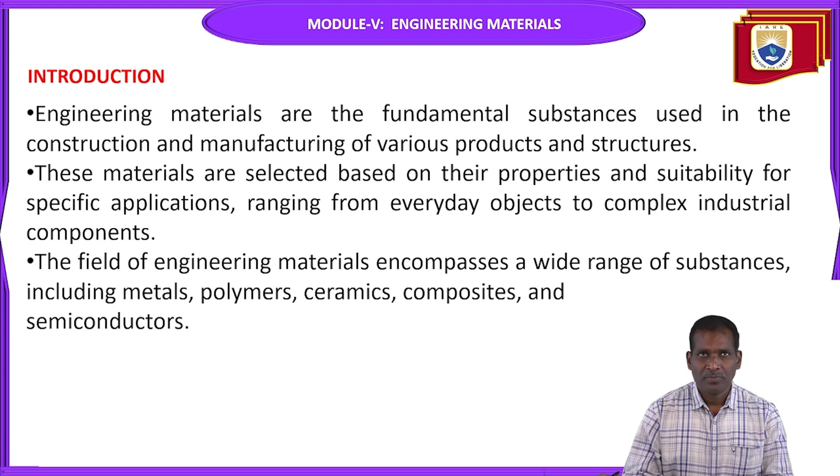In engineering materials, nickel-based alloys are one type. Nickel-based alloys are generally a class of metallic materials. Materials are already divided into two parts: one is metallic, another is non-metallic.

Under the metallic category, nickel-based alloys come under this, and they primarily consist of nickel as the base element. In nickel-based alloys, the primary element is nickel, with other alloying materials added to enhance specific properties, such as strength, hardness, or corrosion resistance.

So if we want to add some alloying materials, whenever other materials are added to the base element, that entire metal is called an alloy. Similarly, in nickel-based alloy, the base element is nickel, and other alloying elements are added to enhance and improve the properties.

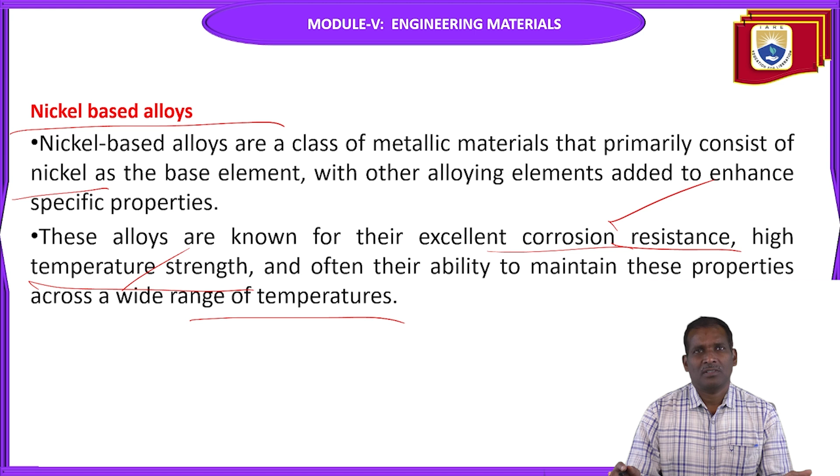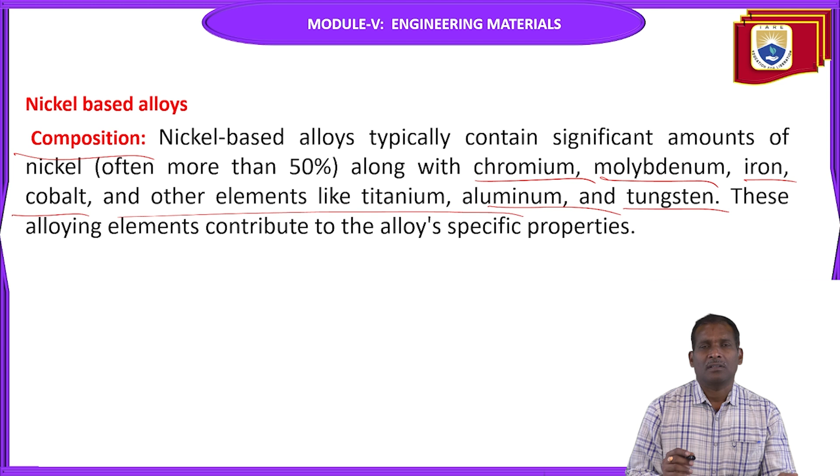So that you have to add alloying elements to the base element to improve these properties. Corrosion resistance is improved, and high temperature strength is also improved, so it can withstand high temperatures. Next, composition: nickel-based alloys typically contain significant amounts of nickel, often more than 50%, along with other elements like chromium, molybdenum, iron, cobalt, titanium, aluminum, and tungsten. These alloying elements contribute to the alloy's specific properties.

The properties are corrosion resistance and high temperature strength. Nickel-based alloys are highly resistant to corrosion. So alloying elements are added to the base element to enhance these properties.

Particularly in aggressive environments, including seawater, acids, and alkaline solutions, it can protect the materials from these atmospheric elements. So whenever the product is exposed to these types of environmental conditions, the product withstands corrosion and erosion and other destroying elements.

So high temperature strength: they retain their mechanical properties at elevated temperatures. The mechanical properties we already know: strength, hardness, creep, fatigue, malleability - these are all mechanical properties. Retaining these properties at elevated temperatures makes them suitable for applications where high strength and high temperature is required, such as in gas turbines, aerospace components, and chemical processing plants.

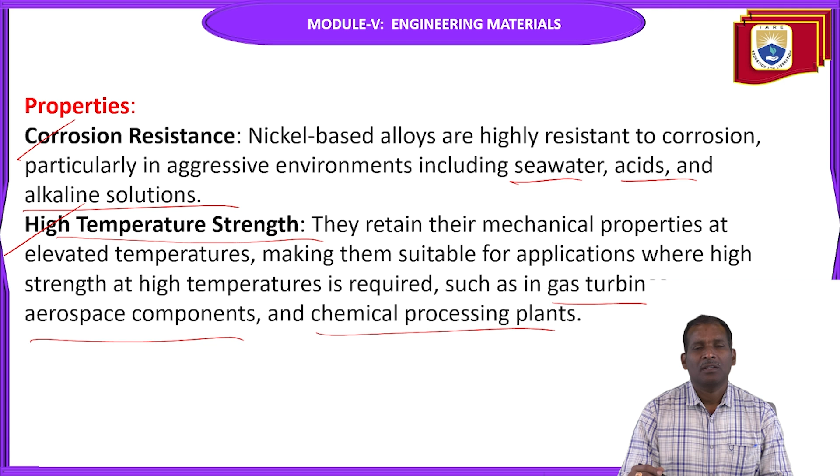So other properties are wear resistance and fabricability. Some nickel-based alloys exhibit excellent wear resistance, which is beneficial in applications involving friction and wear. Fabricability means they can be fabricated into various forms such as sheets, plates, tubes, and wires, and can be easily welded or machined depending on the specific alloy composition.

So the materials, after adding the alloying elements, should withstand temperatures and corrosion as well as wear resistance. So all these materials require fabricability also - that is weldability, machinability. It can be easily welded or machined depending on the specific alloy composition. So these properties depend upon the alloy composition.

Suppose you want to weld two materials, two metals, or if you want to do some machining - the material feasibility is required. The material is easily machinable or not, easily welded or not. This is required, otherwise no use.

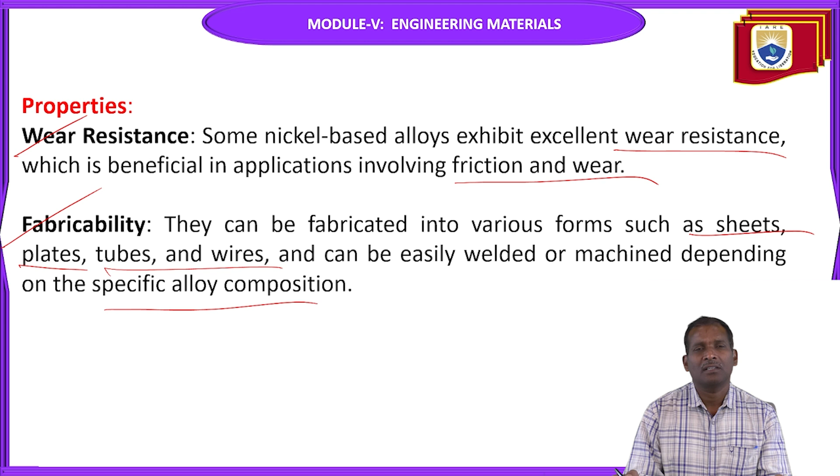Next, applications. Aerospace applications: used in jet engines - high temperature zones, turbine blades, and combustion chambers, and other components where high strength and corrosion resistance are critical. Next, oil and gas: components for downhole drilling tools, valves, and piping systems where resistance to corrosive environments and high temperatures is necessary. In oil and gas companies and aerospace applications, these materials are used.

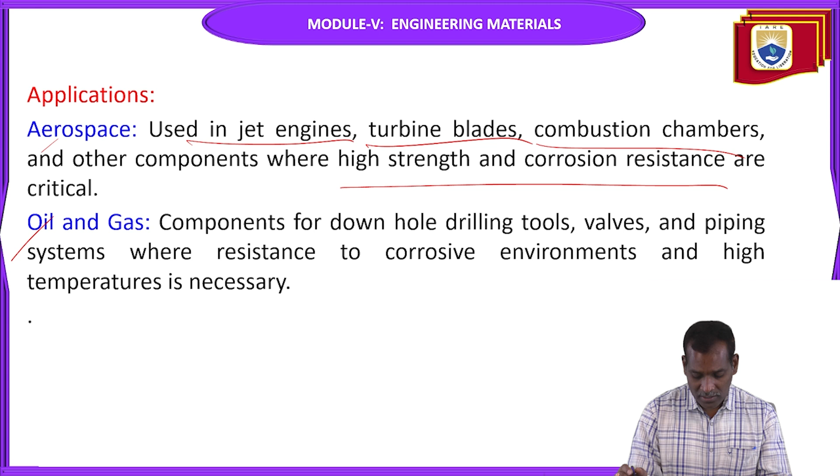Next, chemical processing: equipment such as reactors and vessels where resistance to corrosive chemicals and high temperature is required. Already told, wherever high temperature is required, these types of alloys are used. Electronics: nickel alloys are also used in electronic components and batteries due to their electric conductivity and resistance to corrosion - here, this resistance to corrosion is very important in the case of batteries. In chemical processing plants, high temperatures are important. So these are the applications of nickel-based alloys - chemical processing plants and electronics.

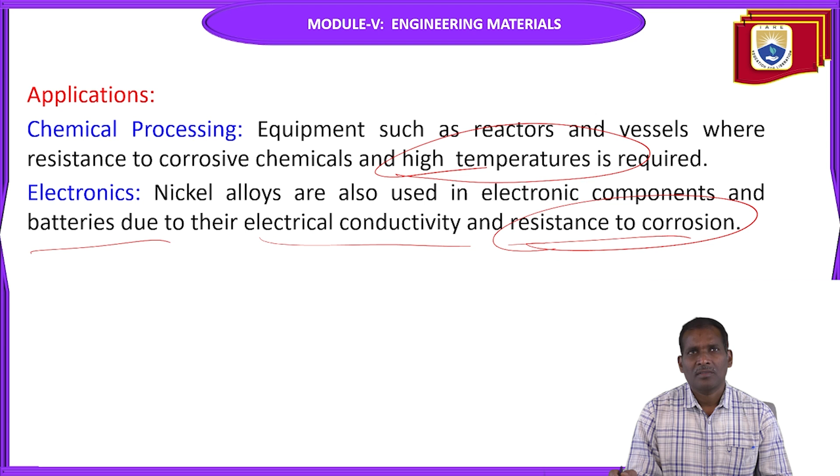There are types also - the nickel-based alloys include Inconel, a well-known family of nickel-chromium-based super alloys, known for their oxidation resistance, high temperature strength, and corrosion resistance. This family is called Inconel.

Next one is Hastelloy, another series of nickel-based alloys known for their exceptional resistance to a wide variety of aggressive chemicals. So these are really exceptional cases. The Hastelloy series is nickel-based alloys for resistance to a wide variety of aggressive chemicals - all varieties of aggressive chemicals can be withstood by Hastelloy. So this alloy is also a nickel-based series alloy.

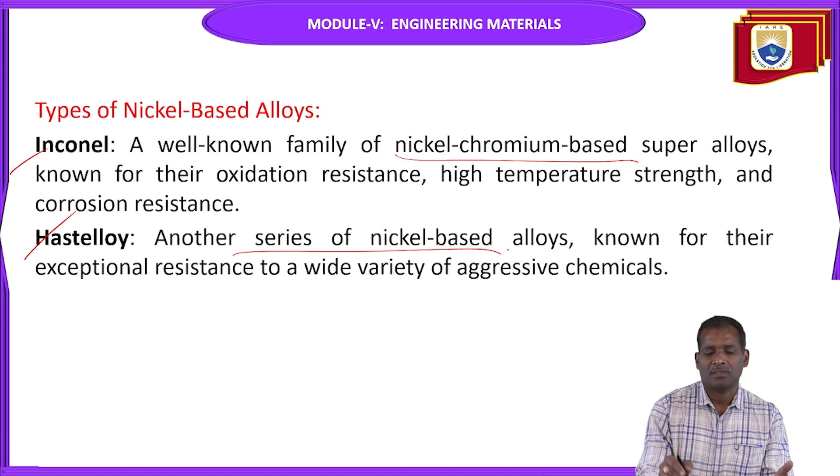So overall, nickel-based alloys are crucial materials in industries where performance under demanding conditions is required, offering a balance of high strength, corrosion resistance, and thermal stability. Their versatility and reliability make them indispensable in modern engineering applications.

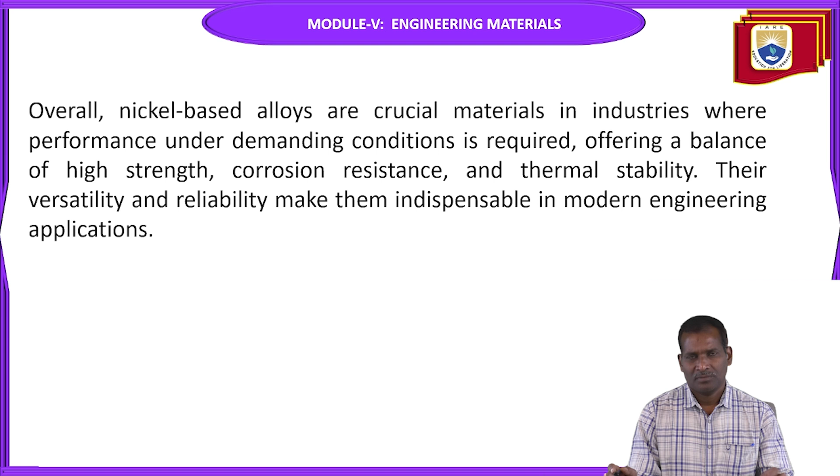Next material is magnesium alloys. These materials are metal alloys primarily composed of magnesium - the base element is magnesium, often combined with other elements to enhance specific properties. These alloys are known for their lightweight properties, excellent strength-to-weight ratio, and good machinability.

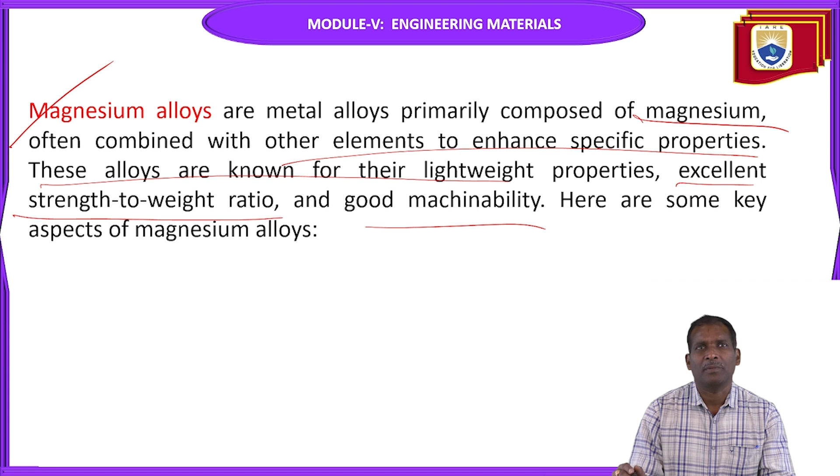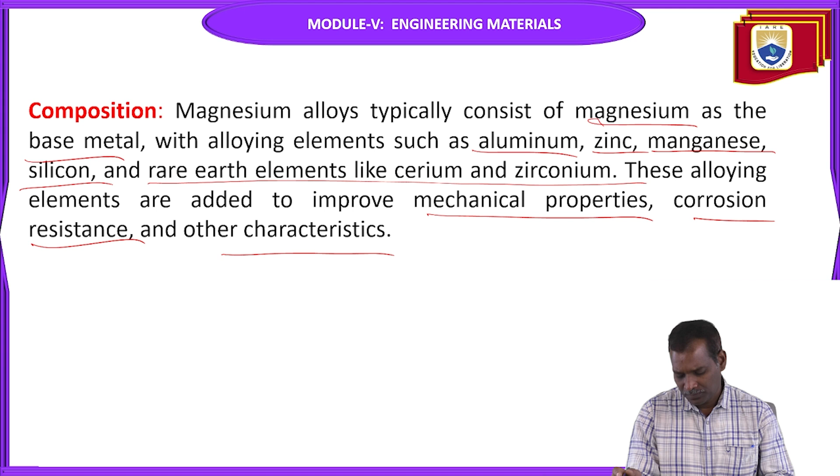So these are the main properties. To enhance these properties, you have to add some other alloying elements to this base element magnesium. Here are shown some key aspects of magnesium alloys composition. The main composition consists of magnesium as the base metal, with alloying elements like aluminum, zinc, manganese, silicon, and rare earth elements like cerium and zirconium. These alloying elements are added to improve mechanical properties, corrosion resistance, and other characteristics.

The properties are lightweight property. Magnesium is one of the lightest structural metals, making magnesium alloys highly attractive for applications where weight reduction is critical, such as in automotive and aerospace industries. High strength: despite its low density, magnesium alloys can exhibit good strength, especially when alloyed with elements like aluminum or rare earth metals. So these are the properties: lightweight and high strength.

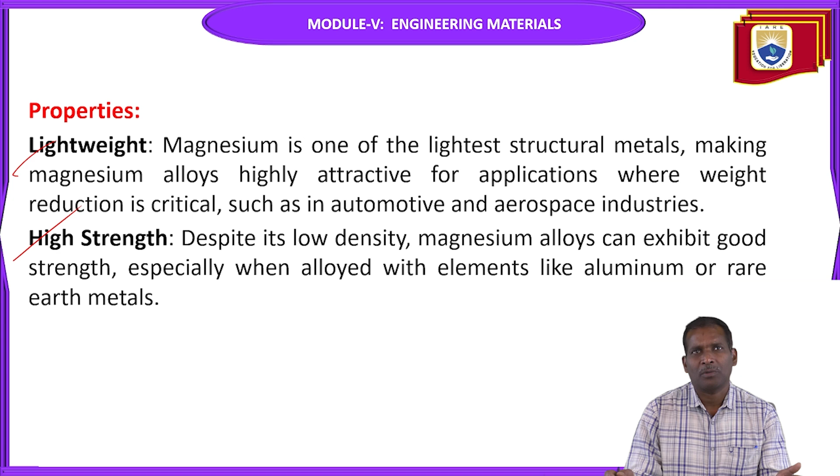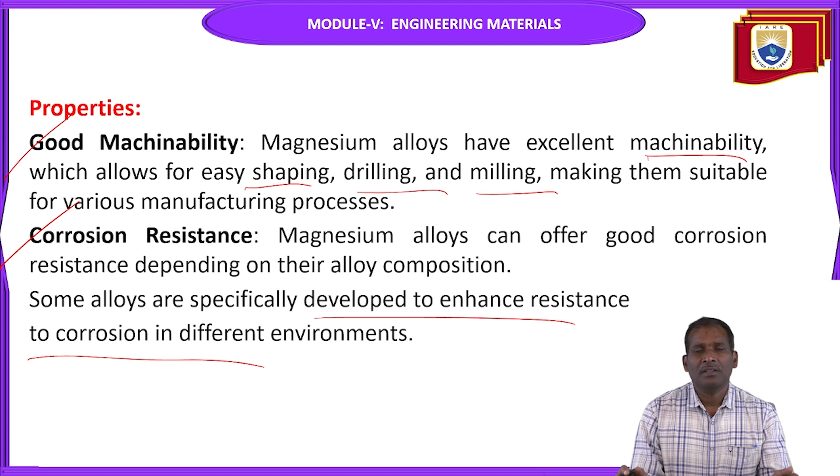Corrosion resistance is the next property. Magnesium alloys can offer good corrosion resistance depending on their alloy composition. Some alloys are specifically developed to enhance resistance to corrosion in different environments.

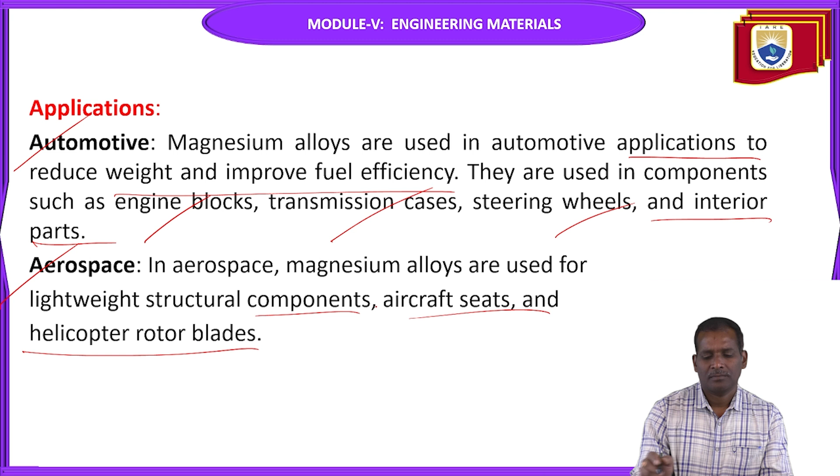Next, applications of these magnesium alloys in the automotive and aerospace sectors. Magnesium alloys are used in automotive applications to reduce weight and improve fuel efficiency. They are used in components such as engine blocks, transmission cases, steering wheels, and interior parts. In aerospace, magnesium alloys are used for lightweight structural components, aircraft seats, and helicopter rotor blades.

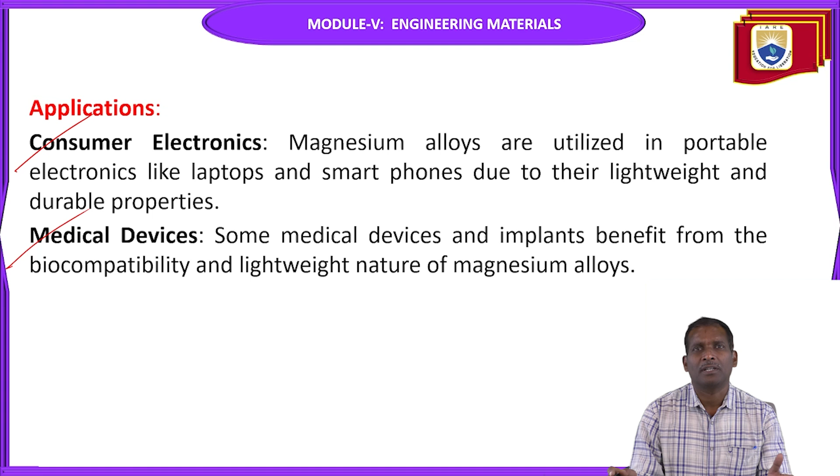Other applications are consumer electronics, such as laptops and smartphones. These magnesium alloys are used for these products due to their lightweight-to-strength ratio and durable properties. In medical devices, some devices and implants benefit from the biocompatibility and lightweight nature of magnesium alloys.

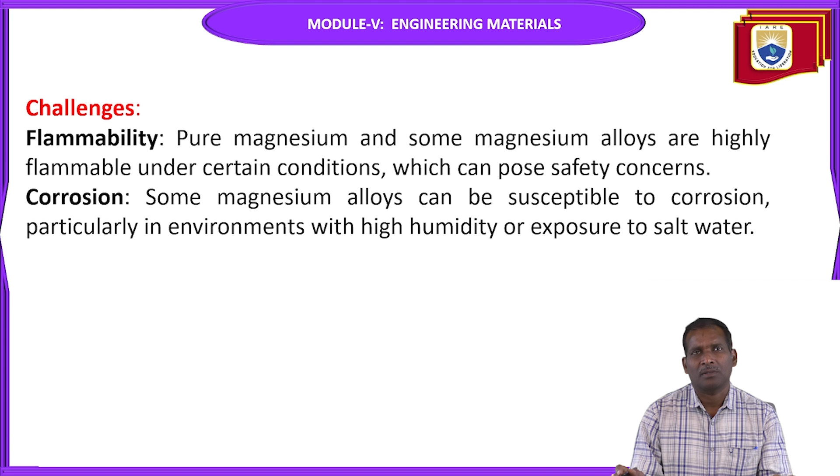So the challenges are flammability and corrosion. These are two very important challenges, and the question is how to overcome them. Pure magnesium and some magnesium alloys are highly flammable under certain conditions, which can pose safety concerns. Some magnesium alloys can be susceptible to corrosion, particularly in environments with high humidity or exposure to salt water. Whenever the material is exposed to salt water and high humidity, corrosion becomes possible. So controlling corrosion and avoiding flammability are the major challenges.

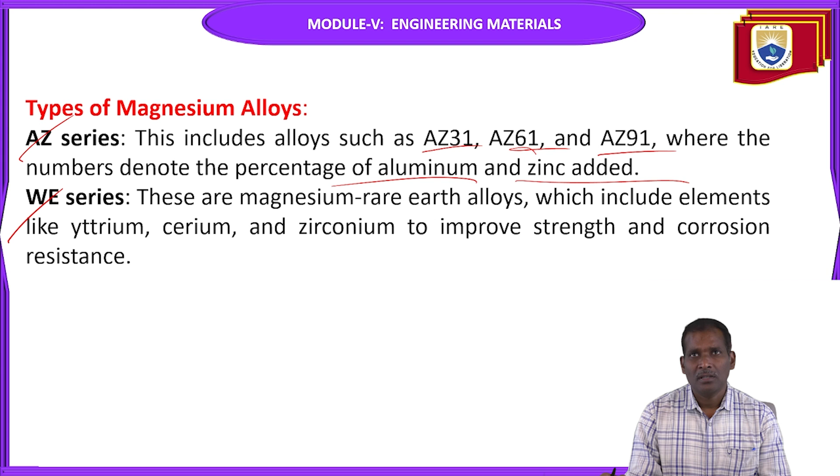Next, types of magnesium alloys: AZ series and WE series. The AZ series includes alloys such as AZ31, AZ61, and AZ91, where the numbers denote the percentage of aluminum and zinc added. The WE series are magnesium rare earth alloys, which include elements like yttrium, cerium, and zirconium to improve strength and corrosion resistance. These WE series and AZ series are used in various applications.

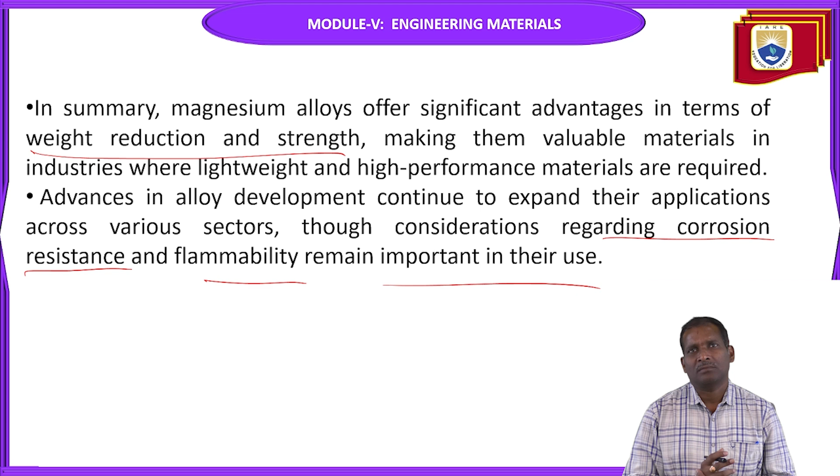So finally, in summary, magnesium alloys offer significant advantages in terms of weight reduction and strength, making them valuable materials in industries where lightweight and high-performance materials are required. Advances in alloy development continue to expand their applications across various sectors, though considerations regarding corrosion resistance and flammability remain important in their use. These are the main materials used in industries and other sectors: nickel-based alloys and magnesium-based alloys.